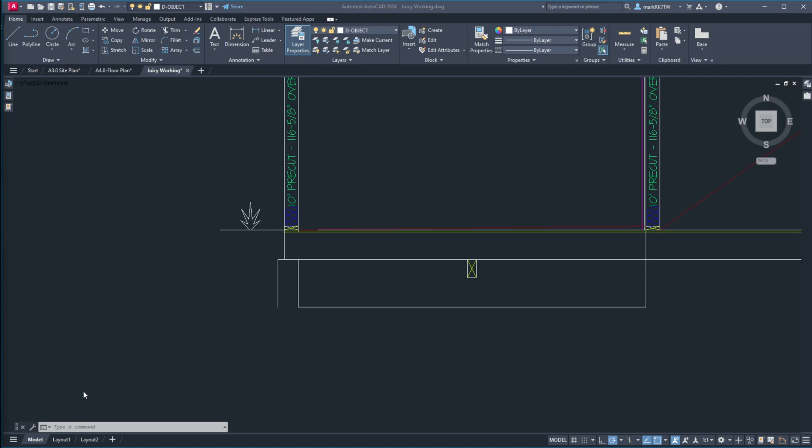All right, Kevin, this is Mark, Knot Square Design, and I'm just going to kind of run you through this instead of have you watch that whole long video. I haven't been out there yet, of course, because I'd really like to talk to you and get that letter sent off to the city. So hopefully we'll get a chance to talk tomorrow. Before I go to bed at night, just want to run through this with you.

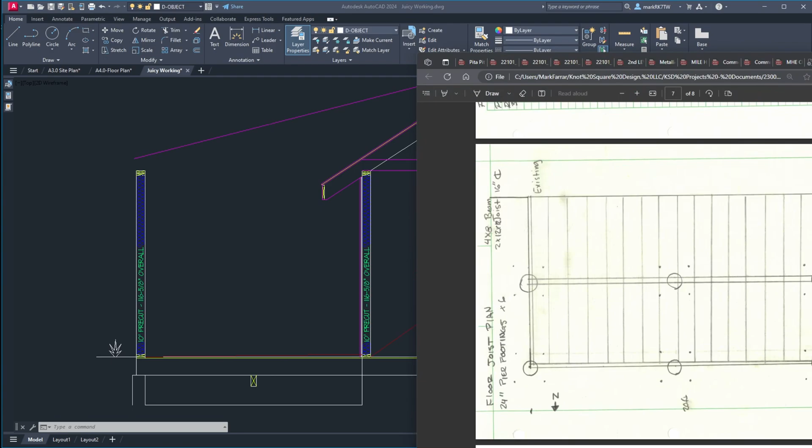There is the plan that some stuff you guys, I'm guessing, this is all the information that was turned in for the original permit. So what I've been able to glean from this is that we've got the desire to use Bigfoot footings. Those will have to be at 42-inch depth, and then a 4x8 beam is what this is. It says it is. Now I have to size that to see if that's appropriate, but it'd probably be okay

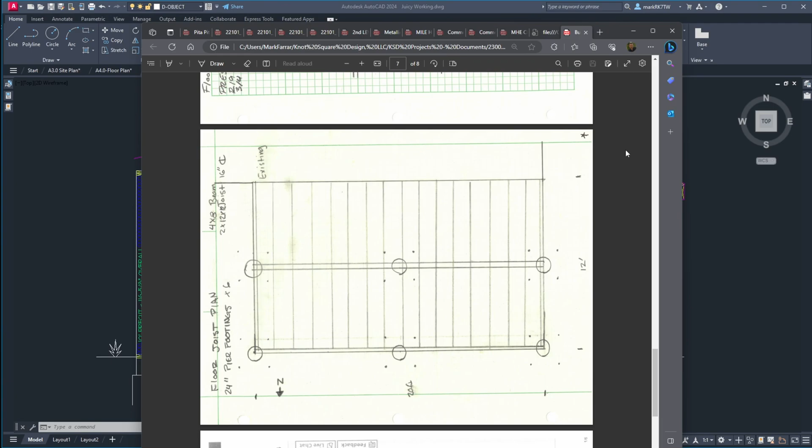because we only have 12 foot, which means there's only 6 foot of tributary placed on it, because half goes to this side and the other half goes to this side. But we have another condition here. The existing building, if it is up on those little concrete blocks and they're just sitting on the pavement, they're not down at frost depth, then we probably have to make this structure independent structurally from this, connected, but what's called a soft connection. So just kind of want to cover that real quick so that you understand my drawing.

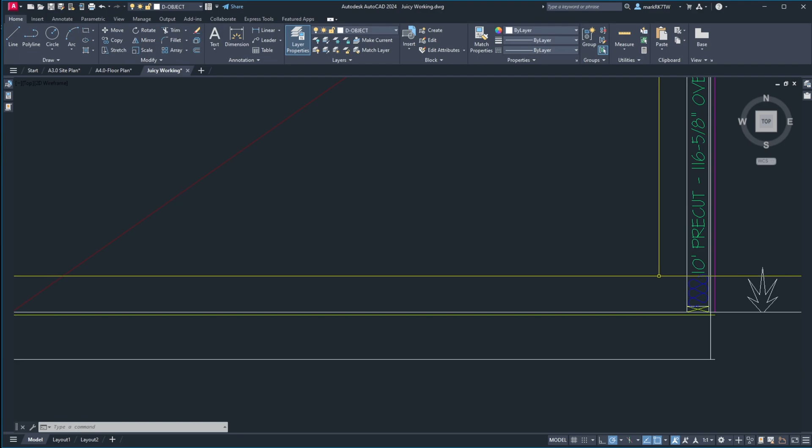So this is the existing building as I've got it so far. And then this is the new building. And there's things we have to consider. So because the other ones are 2x12s, this distance is 11 and a quarter inch. So it's a true 2x12 in nominal lumber. And then there's the 2x8. And then this is the ground. This line right there, that's the ground. Because in 2018, the code stated that this distance had to be 12 inches minimum, clear of dirt.

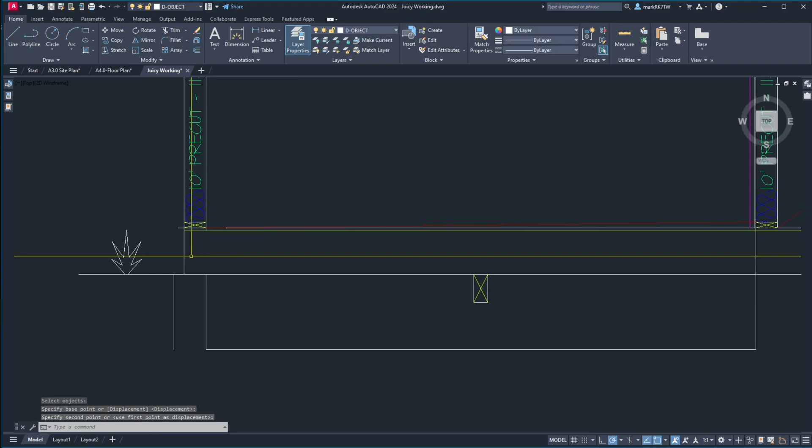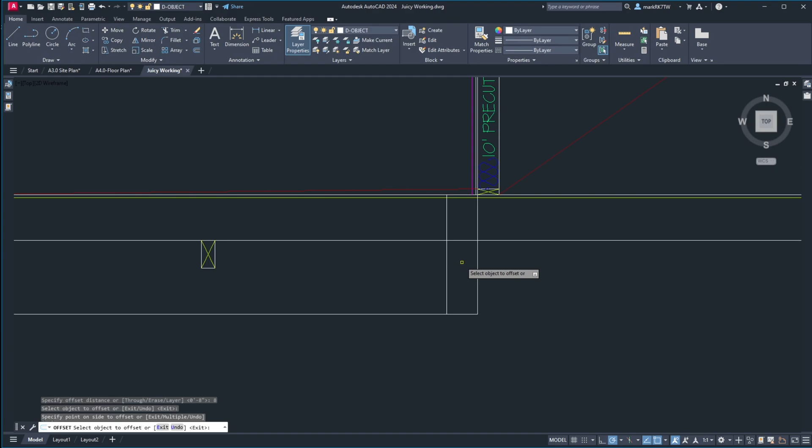So let's just say I've got this drawn wrong, so let's put it where it should be, which is down probably somewhere near the base of your 2x12s per the pictures that are shown. So I'll move that right now. Let me trim these back and then move this guy from there down to here. So that's probably about where grade is. So you'd have to excavate out this area, and then what would probably happen is we'd have to put an independent wall in here to set this floor joist on, meaning this portion, that boy right there.

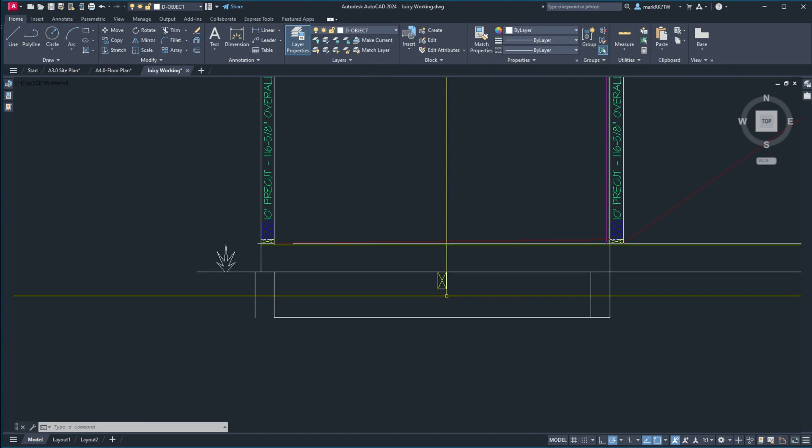Now, can I span the whole thing? I don't know. I need to size it, but I might be able to span the whole thing and don't need the 2x8, or I need to put in a glulam, or we need to find a bigger timber. I don't know yet, but that's pretty straightforward. And I can run some tests for you so you can make a decision on what you prefer. So

when I get to how this thing's put together, there's one other thing that we have to consider, and that is, the best I can determine is that this original place was built in around 2002, so most likely they went with minimum OSB 7/16 sheathing, and then most lap siding ends up being about 1 inch. And that's all that this represents. Then there's a 2x6 wall with insulation in it.

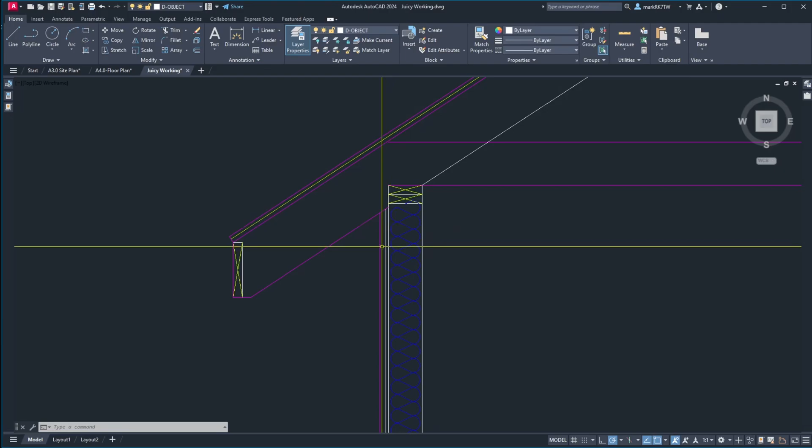And then I put a bird's mouth cut because you described that there is a vaulted, probably frame-on-site type system going on in here, but I'll know more of that when I get out there. So this is kind of how I imagine that it looks. So the big deal is the new. So when we get to the new, we have got to follow the codes from the 2021 application of the IECC, or the International Energy Conservation Code.

And I think I wrote that to you in the previous email, but in the event I did not, find it and drag it across so that you can see what I'm talking about. Now let me pause.

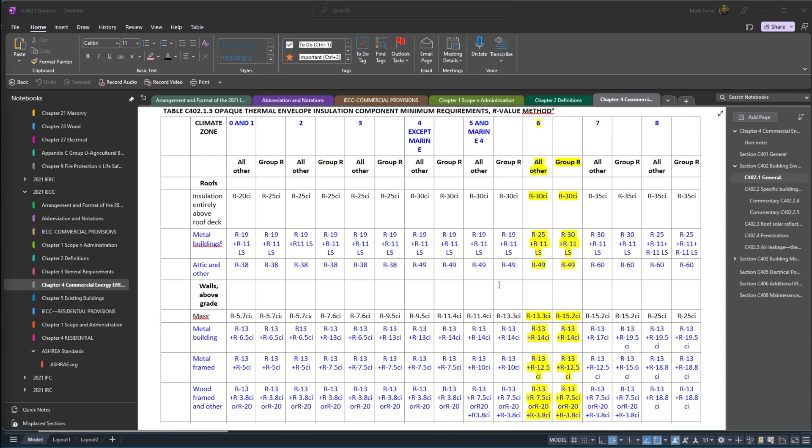So for the sake of an easier search and to have more control, I copy the codes as I need them into OneNote. And so this yellow section, we are in climate zone 6. Here, let me turn on my highlighter. There we go. So we're in climate zone 6 up here at the top. And then what we're looking at is your roof's insulation entirely above the roof deck.

So in a vaulted area, I need to be at an R30 CI. CI stands for continuous insulation. So like a rigid foam or a mineral wool would have to be placed over the rafters under the roofing. If we're doing an attic above the addition, I will need R49.

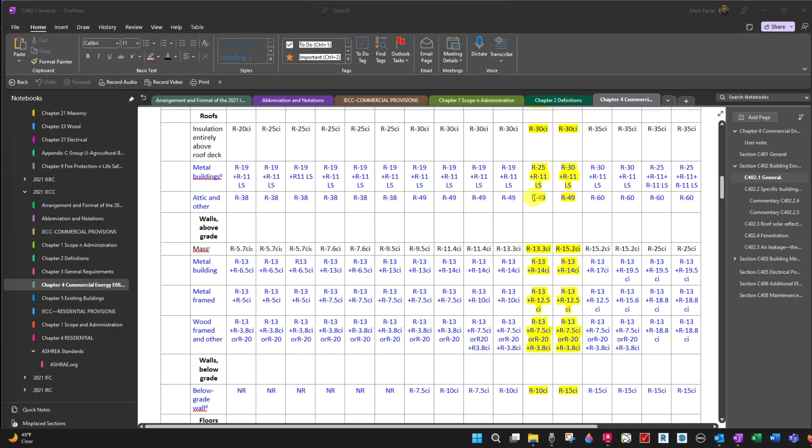And then we have what's called the International Existing Building Code, this IEBC. So that gives you a whole bunch of leniency as to what you need to do with the existing building. Sorry. So don't think that we have to up all of your insulation. Just all the new stuff we have to do.

So the wood framed, this is where it kind of gets a little bit different. So at the wood frame portion, we have to do an R13 in the cavity, which is between the studs, plus an R7.5 continuous insulation, which is about 4.3 per inch, so it's 2 inches. Or we need to do an R20, which, for 2x6s, there is an R21 insulation.

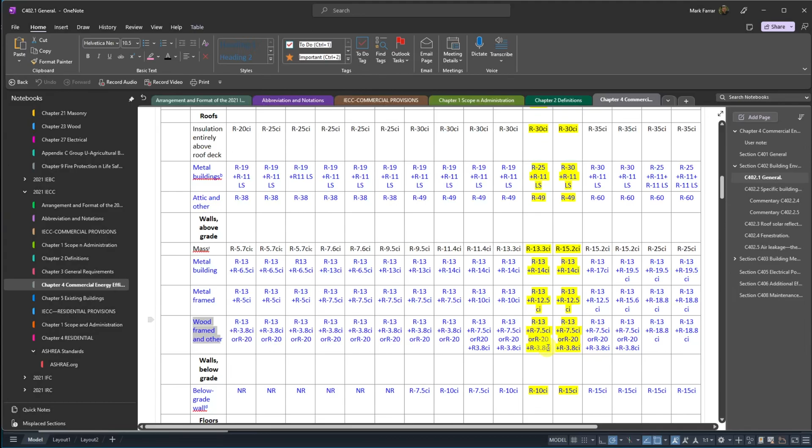R19 cannot be put in 2x6 walls, and it says it right on the bag, for 2x6 walls at 6.25 inches deep, and studs are 5.5. So don't let that fool you. So we can do an R21. It's just a high density fiberglass, and then put one layer of continuous insulation on the outside and meet this code.

So what I'm talking about there is when we look at your floor plan, it's the junction of the two buildings. So if I am correct, and there's the requirement of 7/16 inch sheathing, that is where that's located, outside your stud. So this 5.5 inches here.

And then on your existing building, there's about 1 inch, underneath the vapor barrier, if they put one up. Probably just a Tyvek, or hopefully not worse, type of house wrap that's covering your sheathing, and then they put on the lap siding, which by the time you get to the bottom of the lap where it sticks out the most is about 1 inch typically.

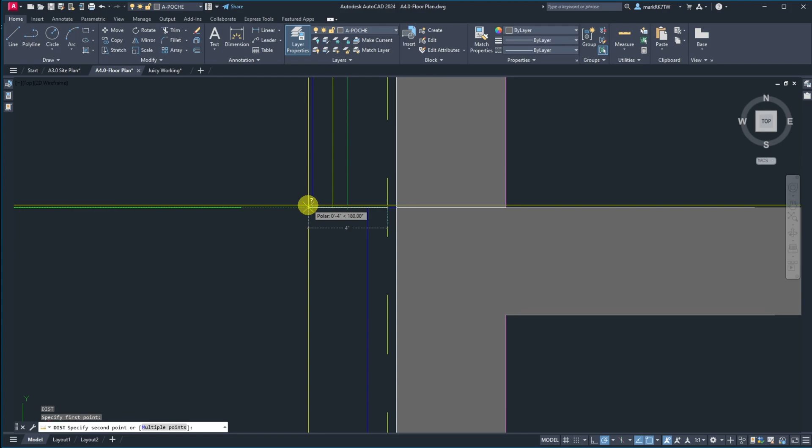So on your new building, we have our R21, let's say, and then if I look at this, I've got a distance here of 2 inches. So I'm going for that 3.8 CI, or I can increase this to 4 inches out there, and then we just put the battens and the siding on that. And let me show you what that looks like.

So this is one of my standard details, and I'm using mineral wool in this case. We can use blue board foam. Mineral wool is just a lot more environmentally friendly. If we can source rock wool, which I may now have a source for, which I was having trouble with, but I have to follow up on that before I can make that a reality.

Then what you're seeing here is the drywall, and then the stud, and then the insulation that's in the cavity in between each stud bay. And then you're seeing the plywood that gives us the shear value. So this is a nailing pattern to each stud, so they can't rack like when you're stacking cards.

And so that nailing pattern is pretty important there. That's why it has to be back here and directly in contact with the stud. Then your continuous insulation is here. And in the one I've drawn for you so far, it's one layer, or we can go 2 layers of 1 inch, as it allows you to overlap the seams. It's such a small building, it probably doesn't make much of a difference, but it will make some because it obviously just stops what's called air leakage, and that's actually more important than insulation itself.

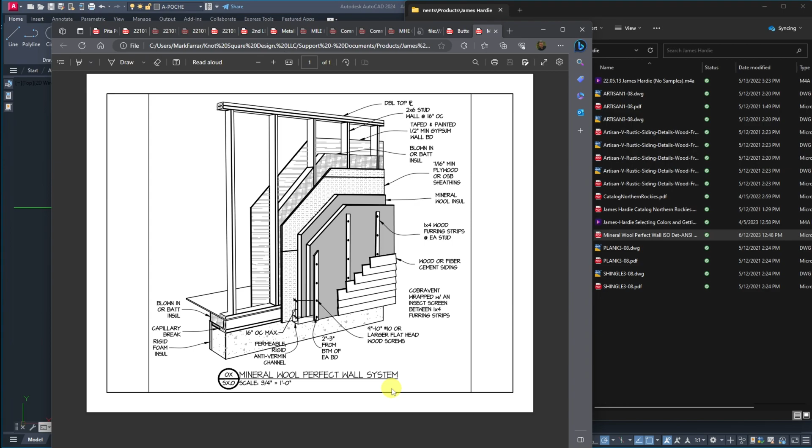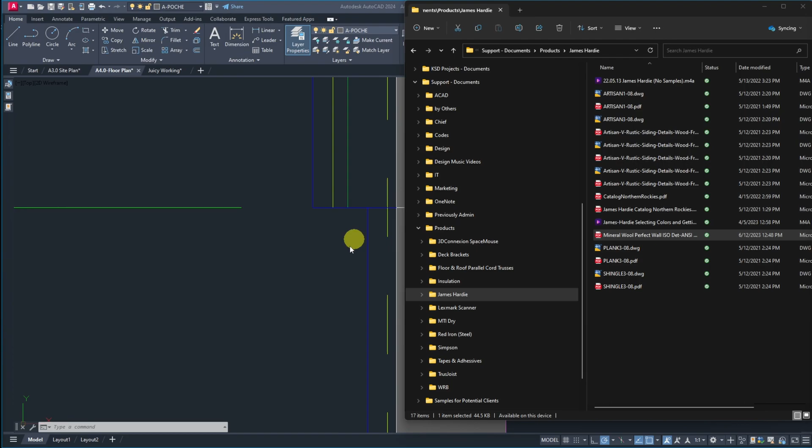Here we have a blown in or batt insulation that goes out to the rim joist. And then we have a rigid foam insulation here, or we can use Rockwool Comfort Board 80 if I can locate it and get it at a comfortable price. So we'll get into that a little further down the road, but we should probably at least talk about it enough so that my drawings are reflective of what we're doing and redo them. So hopefully this layering system, if you have to hit pause, please do if you have questions for me when we talk. That is what's going on here.

And let me just pull it over to the side a little, and then bring this in so you can see it. So that blue line is your siding. This yellow is 3/4 inch, 1x4. Then I've got 2 layers of continuous insulation, whether that be mineral wool, my preferred, or blue board, or foam insulation, Foamular or something like that. Owens Corning now makes mineral wool, but it can't be buried. So if I can't source Rockwool, we can still use mineral wool, but we have to switch to blue board when we go down into the grade.

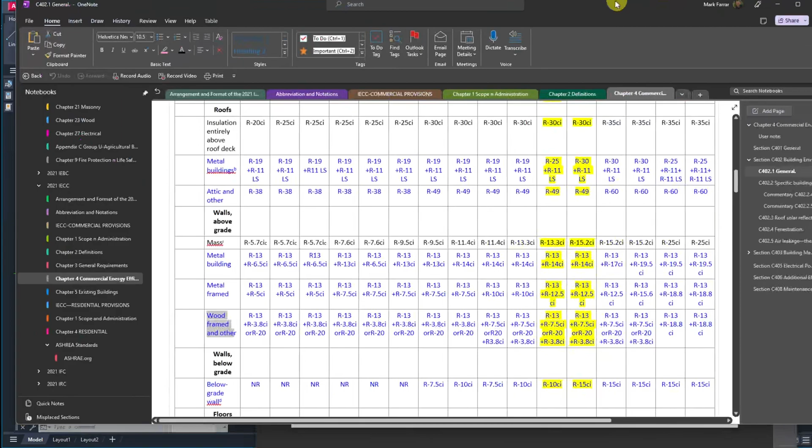And so that is something else that is here. And that's a little bit more difficult to explain without the detail, but I'll try and pull it up. So below grade, a below grade wall needs to be an R10. But we're not dealing with a basement. And this is one thing I want to talk to you about at one point: do we want to do this new addition as a slab and bring in some engineered fill to get it up to the same height as the old? It's a cost analysis thing to see what is best.

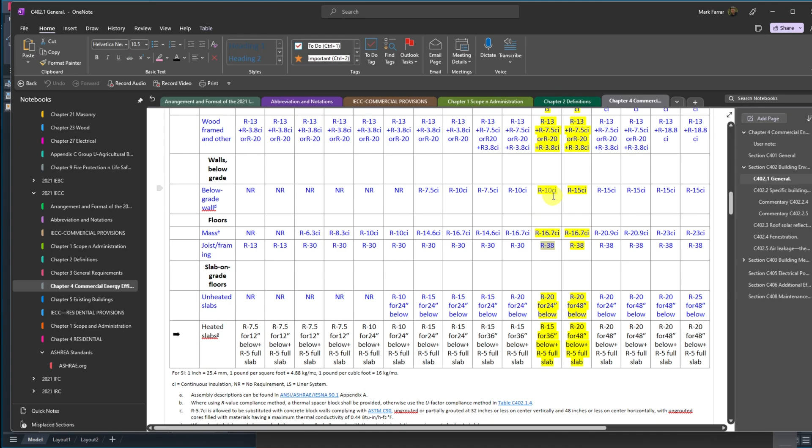Otherwise, we need an R38 in your joists, and then going down along the insulation for 24 inches of depth, we need to have an R20, and blue board 2 inches is about R10. So we would need to go with 2 layers to get that R20 to go 24 inches down. And just be glad it's not residential, because then you have to go 48. So that's, I guess, kind of the gist of where I am at with this at this point in time.

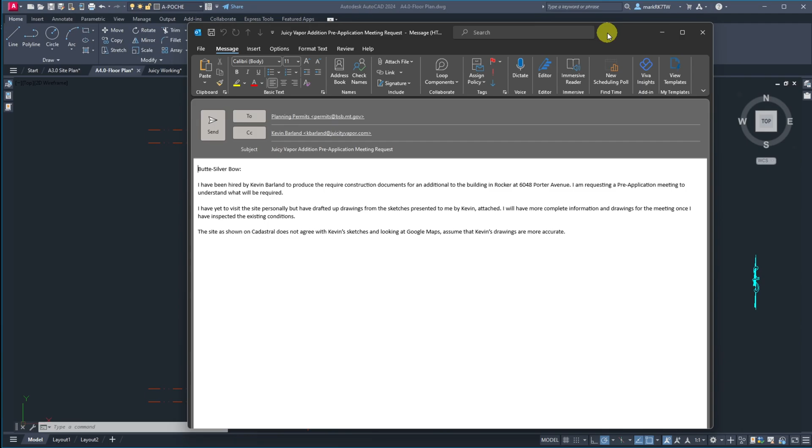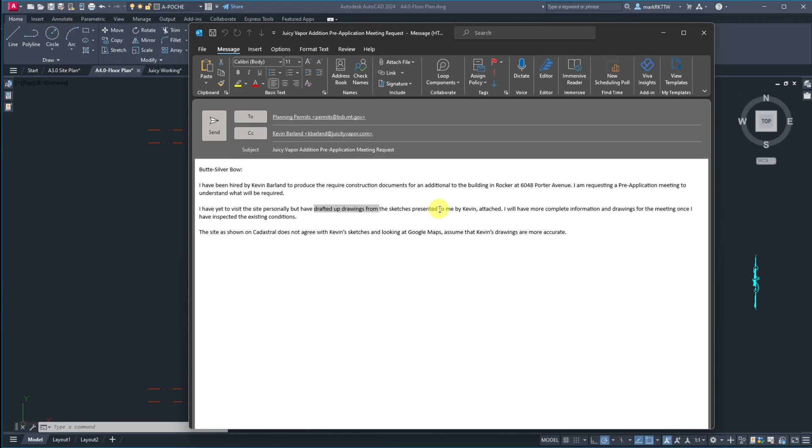And I've got a letter started to make a request to Butte Silver Bow. And so there's the beginnings of it. And I just want to ask you some questions so I don't word anything in here that's not accurate. And so I'm drafting up the drawings, as you're seeing, and I probably won't attach any sketches. I'd have to look through them and see if there's anything that was really appropriate to bring into the meeting.